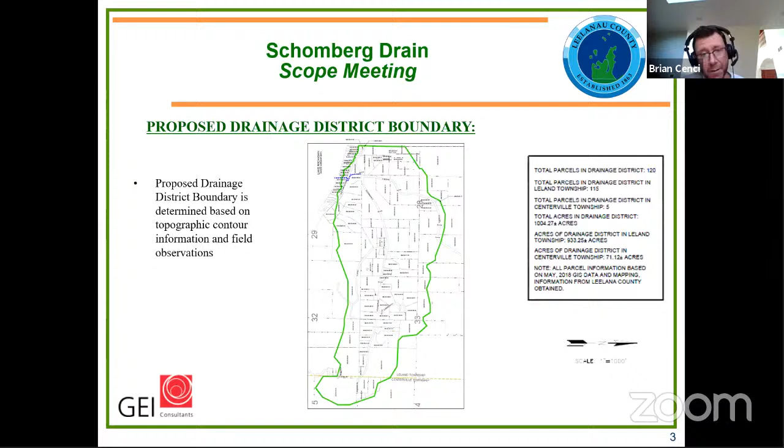On the screen here below is the proposed route of the drain as we anticipate it. Over to the left side of the screen is Lake Michigan. This is M22 Schomberg Road.

What's shown in the solid green line is storm sewer pipe in the ground that we expect to be installed by directional drilling or trenchless installation, meaning we won't be disturbing the ground by open cutting with an excavator or anything like that. The solid green line is the proposed storm sewer location that we anticipate to go in the ground and be directionally drilled in place.

The dashed line is roughly the location of an existing ditch that goes up from M22, a ditch along M22 to Schomberg Road, and goes underneath Schomberg Road in that location. We're not proposing to make any improvements to that ditch, but as part of the permit, we've had to accommodate that water and still continue to have that open ditch in place because it's considered a regulatory stream in the eyes of the state. We can't block that water or redirect it in a manner that causes it to be filled in. The proposed drain route is about 1,200 feet and only encompasses 2 properties.

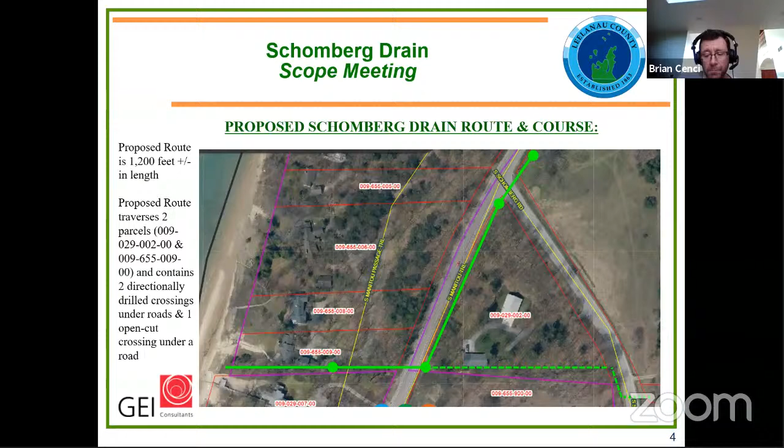Looking at the proposed route of the drain, this is the easement area where we anticipate to directionally drill underneath M22. Where my cursor's at on the left picture, it would be on the south side of M22, and what we would do is set up a bore pit on that side and then directionally drill underneath M22. The prior map, you'll notice, had a catch basin near the garage door of this property.

This property is owned by the Tuppers - Tupper is their last name - from whom we got an easement in order to do this work. The picture on the right shows that alignment looking again out towards Lake Michigan, on the south or east side of M22 in that location as well. It's pretty close to this property line in through here, and that's one of the reasons why we aren't able to open cut it in this location.

Also, for purposes of installing it within the easement given for this work - and we didn't have to pay for that particular easement in order to install the pipe there - in order to actually fit it in that location close to the south property line, that's the other reason for having to do a trenchless installation.

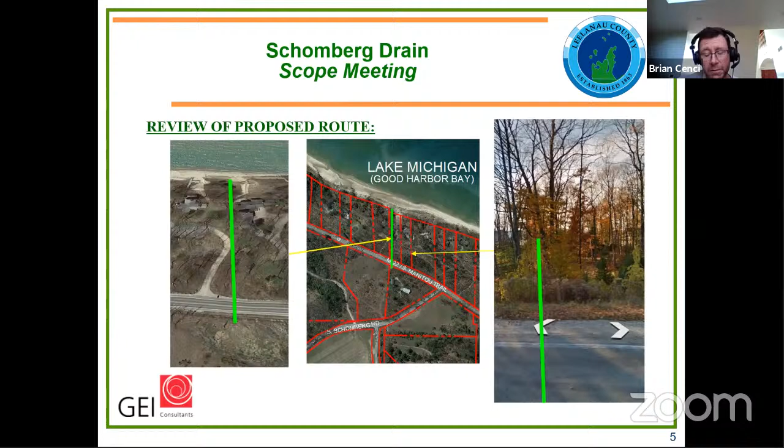The next page shows some pictures so everyone can see the alignment. It's again tight to the house. The top left picture shows roughly where that alignment would be underground, and the bottom left picture shows about where it would outlet, about 45 feet just to the east of Lake Michigan there.

The pipe would be exposed at that location, and there would be a small riprap channel down to the beach there. The outlet is roughly along that line you can see, taken from the Tupper property. The bottom right picture shows where that bore pit would actually be dug on the east side of M22, and the location of a proposed catch basin once that bore pit was dug.

The dashed line in the bottom half of that picture shows where that existing open ditch goes back onto the Molesky property in that location.

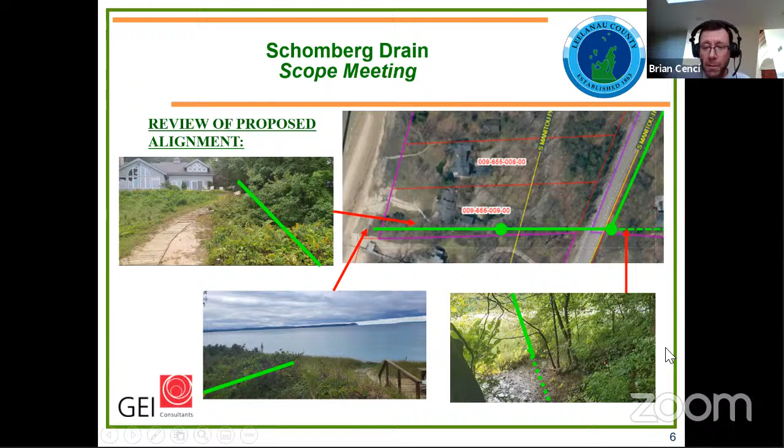I put a profile of what the ground looks like in this location, so everyone can see why we need to dig this by trenchless means. You can see the two catch basin locations where the storm sewer is rather deep so we can daylight it out into Lake Michigan. There's close to a 25-foot cut in that location, but the storm sewer runs shallow from the catch basin near the driveway on the top property to the east side of M22. Where my cursor is is about the center line of M22, and you can see exactly how deep it would be if we had to open cut it - almost 20 plus feet deep. To excavate that we'd have a pretty wide trench taking up a good chunk of the road.

So that's the other reason for doing a trenchless directional drill in that location.

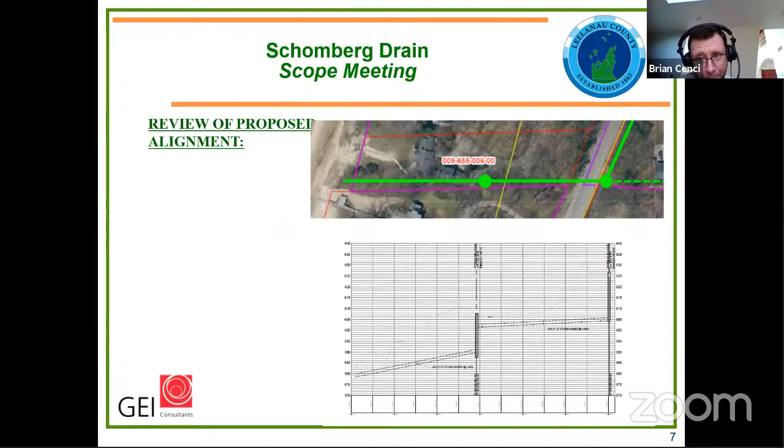So in that location we are currently in discussions with the Conservancy. They have a conservation easement over this area with the homeowner, Bruce Molesky, who owns this property. We have a proposed dry detention basin proposed to be installed in this location.

The reason for the detention basin is so that all we need is a 12-inch storm sewer pipe from the outlet location along M22, crossing under M22 out into Lake Michigan - it only has to be a 12-inch pipe, because large storm events will collect in this area, and the water will be slowly released through a control structure on the north end of this detention basin out into the storm sewer along M22. This also allows us to clean the water prior to discharging into Lake Michigan.

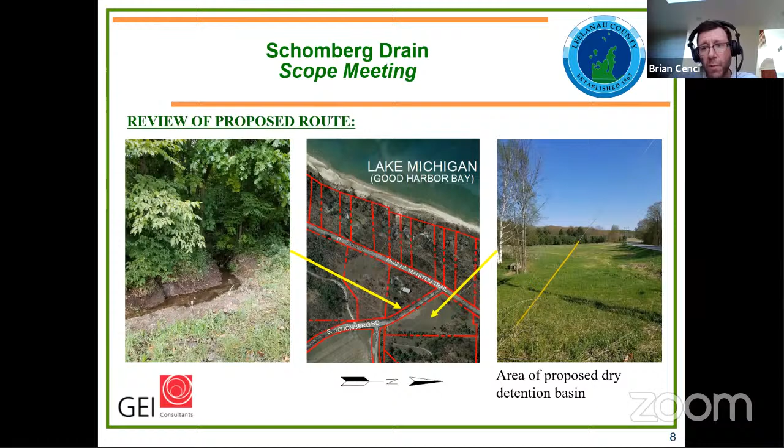The next slide shows an overall plan view of what the dry detention basin grading plan would be. On the south end is the first flush area for stormwater treatment. There are two separate bays where the bluish, aqua colored area in the bottom shows what it would look like after a rain event, with water standing there. You can see a series of dashed lines in a herringbone structure - those are under drains that would be underneath the bottom of the detention basin.

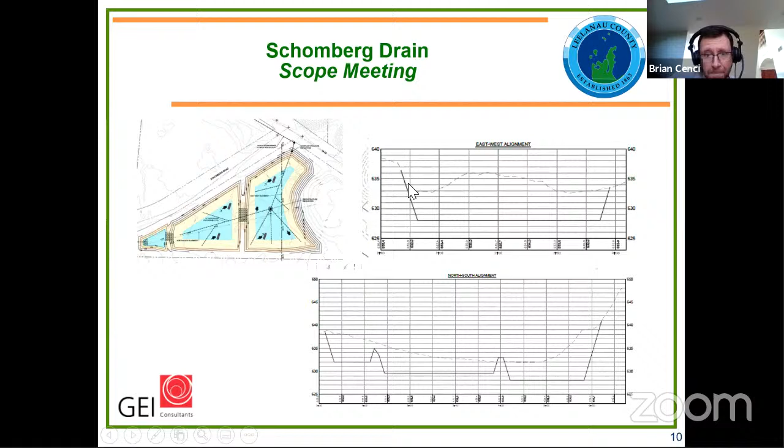It's a little tough to see, but this is actually our design plan sheet. This is showing the pipe along M22 in the location that we're proposing to directionally drill. And this shows the grading of that dry detention area through there. We're using the trenchless or directional drilling because we're fairly deep, 10 to 14 feet deep we would be if we had to open cut this along M22. It would be impossible for us to install that and stay within the right of way and not impact the road in any manner.

So directional drilling in this case is a lot easier to do if you have storm sewer that's smaller, like 12 or 15 inches. So by putting this dry detention basin system in, it's allowing us to keep the storm sewer size very small, so that we can directionally drill it and install this within the right of way and not have to get additional easement or impact the road and have significantly more costs with this drain project. So this is kind of a cost decision in doing that proposed work. You can see how deep the pipe would have to be if this were an open cut installation.

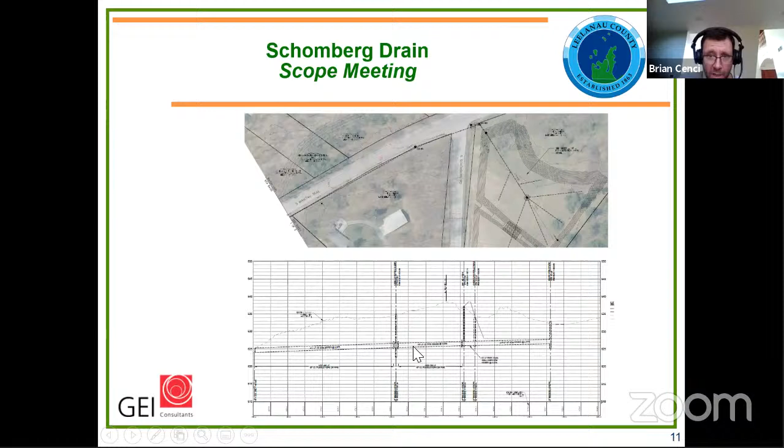And then the very last thing is a very rough schedule. Where we stand today, we have a permit that has been submitted to EGLE. They have not noticed it yet for public notice. As part of the public notice process, we gave them a list of all properties within 500 feet of the proposed work. Once they consider our permit administratively complete, they'll send out a public notice that outlines the work and gives 20 days to receive public comment from any individuals within 500 feet of the work, or any municipalities that are impacted.

We are in discussions with Mr. Molesky and the Conservancy in regards to that dry detention area. Hopefully by the end of May, we should be close to getting that. We look to receive our EGLE permit hopefully by the end of June, such that in July of this year, we can issue a notice of letting, which is essentially the public bid notice for the construction contract. We'd look to have roughly a 4-week bid period where we would make plans available to contractors. You all would receive a copy of that notice of letting. And then in July, you would get a copy of the notice of day of review of apportionments, and around the beginning of August 2021 we'd probably look to have that day of review.